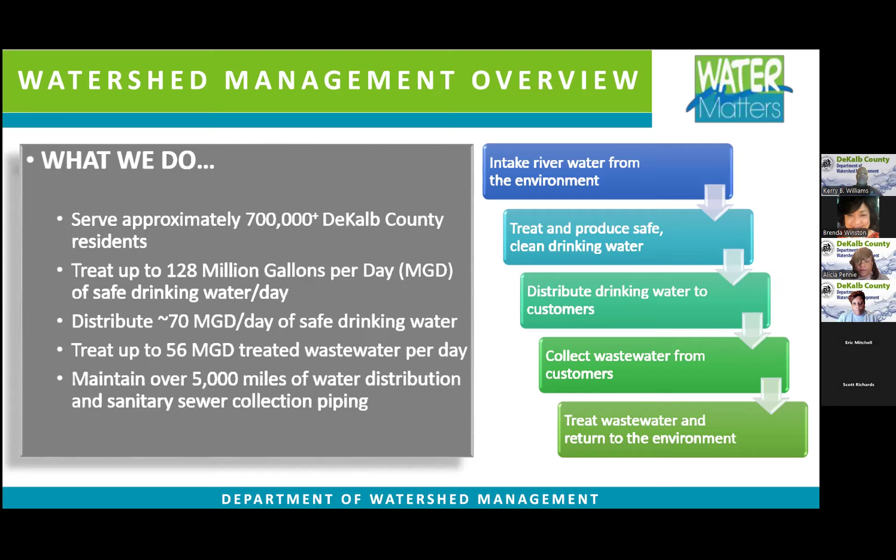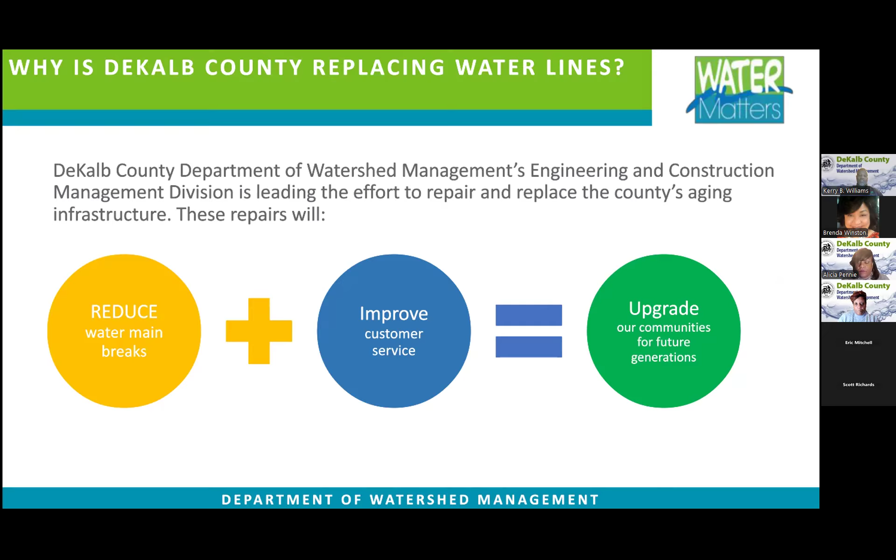So what do we do, and why are we doing this? We want to reduce the likelihood of water main breaks. We want to improve customer service, better pressure, and reduce disruptions due to breaks. So we upgrade our community again. Roads you can see get old. Pipes in the ground, you can't see them get old, but we have technology that can see that they're old. Anytime significant infrastructure upgrades take place, such as a road improvement where we have infrastructure there, we work with agencies such as GDOT to replace our infrastructure as well, so we disrupt the community only one time.

So how do we do this? We have a team, including DWM, DeKalb County Watershed, engineering consultant AECOM, contractor SAK, and GS Construction. These are the people that help us maintain our infrastructure on these type of projects.

So I'm going to step aside and let Ms. Cassandra Marshall, who's the Assistant Director of Watershed, tell you about the problem and the solution. With that, Ms. Marshall, the floor is yours.

All right, thank you, Kerry. Good evening, everybody. My name is Cassandra Marshall. My duties include overseeing Watershed's $4.27 billion capital improvement program. I also manage the construction management staff and the construction contracts.

The problem: primarily, the reason for the project is due to aged infrastructure. The pipes were put in during the 1950s, and the pipes are also undersized due to population and demand changes in the area. Typically the lifespan for these pipes is 70 plus years, so they're at the age when they need to be replaced. Also, although this area has had minimal failures, the urgency of the work has to do with the upcoming GDOT project, where they're going to do a streetscape project, paving curb to curb. So the goal is for Watershed to get our infrastructure upgraded first, prior to them doing the resurfacing project.

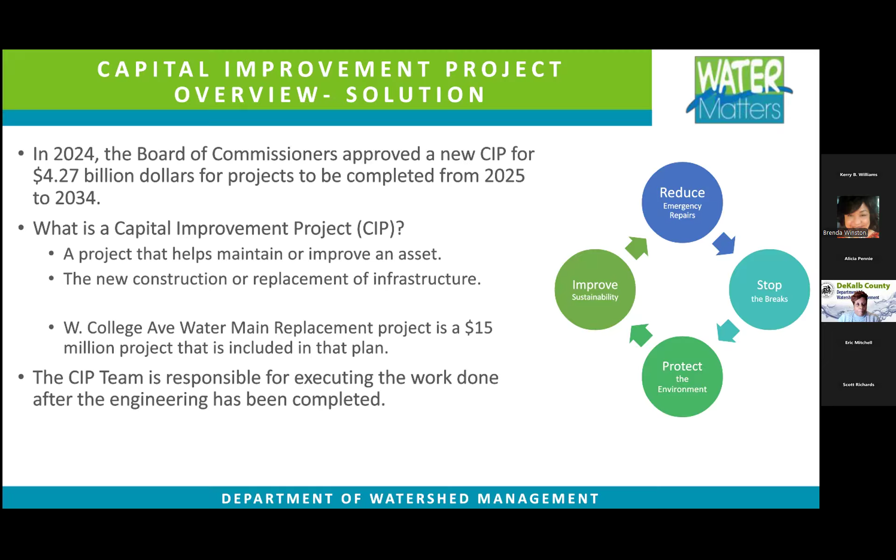Next up in the presentation, you will also hear from the DWM construction manager, Mr. Danny Mathis. Danny has over 30 years of construction experience, and he also holds multiple state licenses and certifications. You will now hear from Mr. Danny Mathis about the project scope.

Thank you, Cassandra, for the warm introduction. Again, my name is Danny Mathis, I am the construction manager. I'm responsible for the annual water sewer project, also CIP contracted projects.

West College Avenue Water Main Replacement Project Scope. Planned work includes installing nearly 420 linear feet of 6-inch DIP pipe, 550 linear feet of 8-inch DIP pipe water mains, 5,800 linear feet of 12-inch DIP pipe, and 2,250 linear feet of 16-inch DIP pipe, including service lines, hydrants, valves, pavement restoration, water meter boxes to grade.

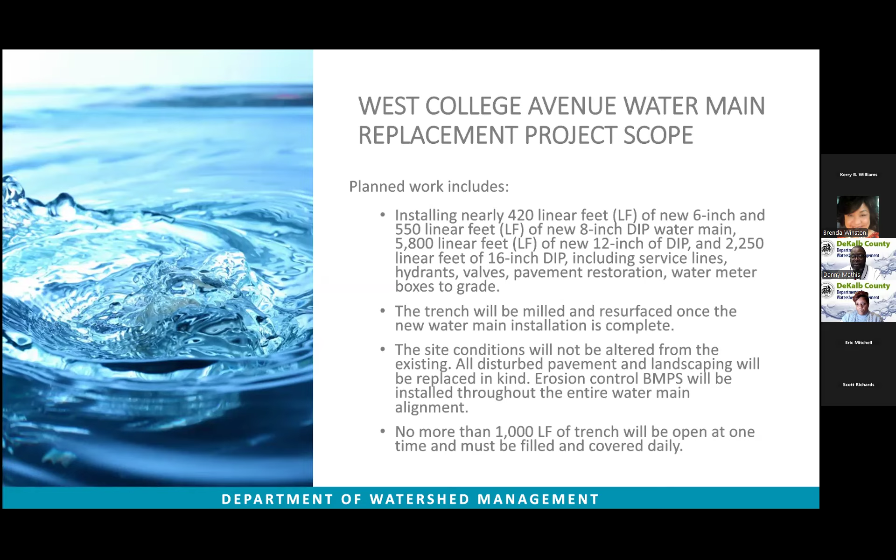The trench will be milled and resurfaced once the new main is installed. The site conditions will not be altered from the existing ones. All disturbed pavement and landscapes will be replaced in kind. Erosion control BMPs will be installed throughout the entire water main alignment. No more than 1,000 linear feet of trench will be open at one time and must be backfilled and covered daily.

What to expect? Unfortunately, what comes with construction is inconvenience, which we plan to minimize. You're going to see a lot of construction traffic, foot traffic, vehicles, large trucks, and heavy equipment. There will be construction workers, county workers, and contract workers throughout your community. Materials and equipment will be delivered by large tractor trailer trucks. Crews and flaggers will guide you through these zones.

What also comes with working in these areas is parking issues. There will be vehicles parked along the side of the street and along the work zone. Work zones will be delineated by cones and barrels. As a security measure, all county contractors and county employees will be identified with a badge and marked vehicles. There will be increased noise from equipment, backup alarms, heavy equipment, use of saws, and cutting asphalt.

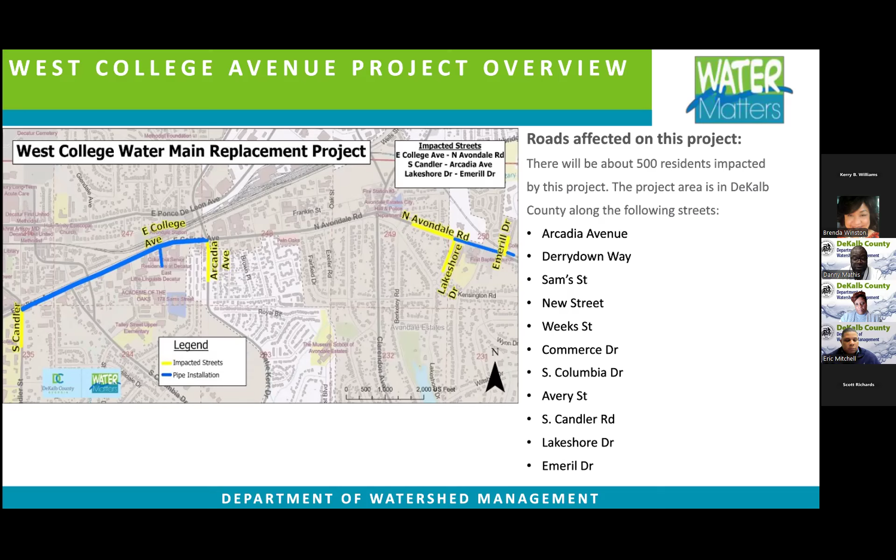The next person you will hear from would be Eric Mitchell. Eric Mitchell has about 10 years of experience in construction. Thanks for the introduction, Mr. Mathis. Next slide, please.

My team and I are the boots on the ground. We are the first point of contact for this project. From day one, we're on site monitoring all construction activities. We check that erosion and sediment controls are in place, confirm that the contractor installs the pipe exactly as designed, and ensure that safety protocols are followed at all times. At the end of each day, we make sure trenches and holes are properly backfilled and secured so the area is safe for residents and traffic.

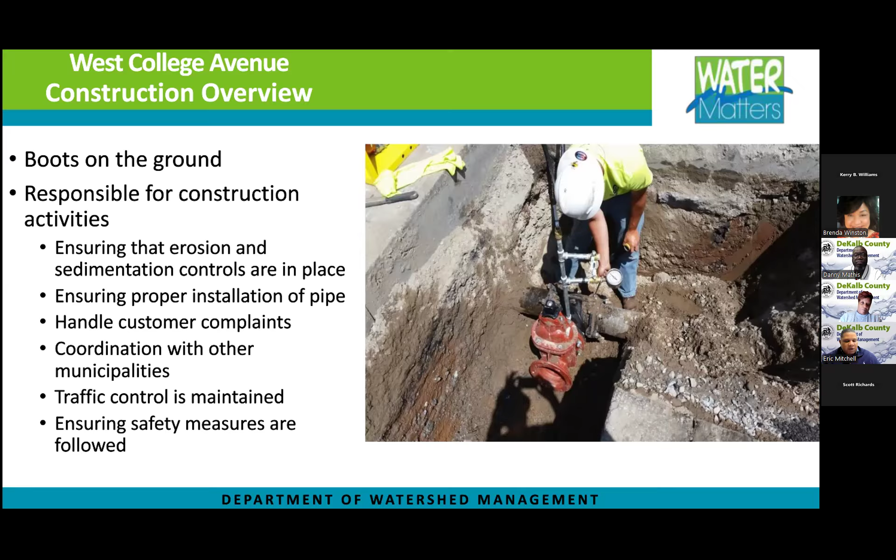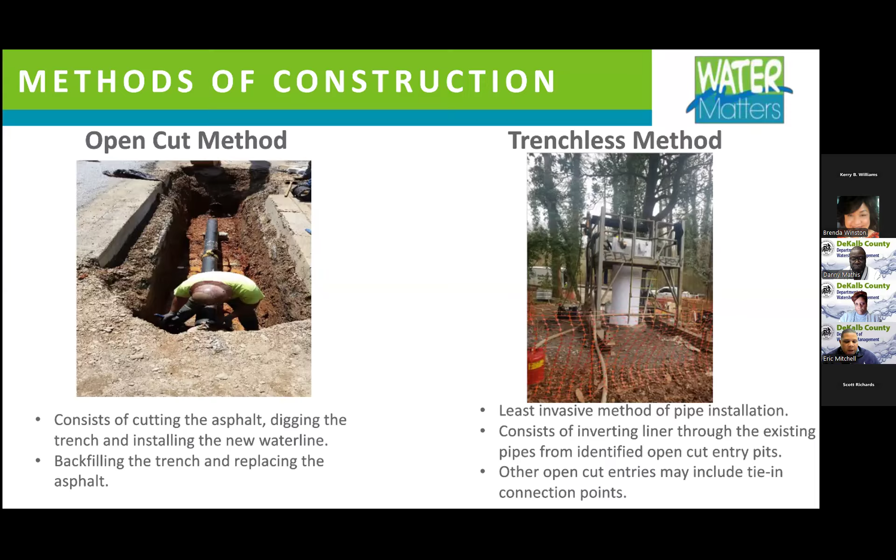Methods of construction: this project will use two methods, the open cut method and the trenchless method. Open cut consists of cutting the asphalt, digging the trench, installing the new water line, backfilling the trench, and replacing the asphalt. Our trenchless method, the least invasive method of pipe installation, consists of inverting a liner through the existing pipe from identified open cut entry pits. Other open cut entry pits may include tie-in and connection points.

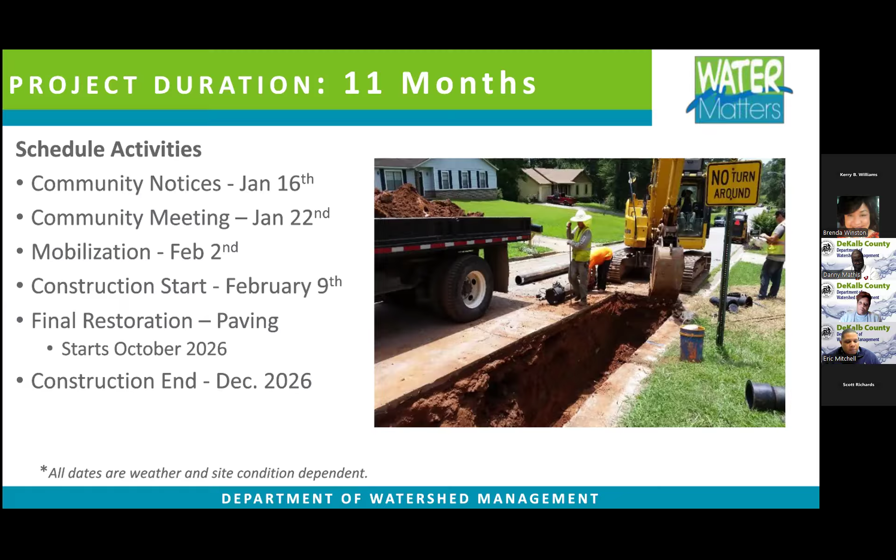Project duration is about 11 months. Scheduled activities: community notices went out on January 16th. Our community meeting is today, January 22nd. Contractor mobilization will be on February 2nd. Construction will start on February 9th. Final restoration, which includes paving, will start in October this year, and the end of construction will be December 2026.

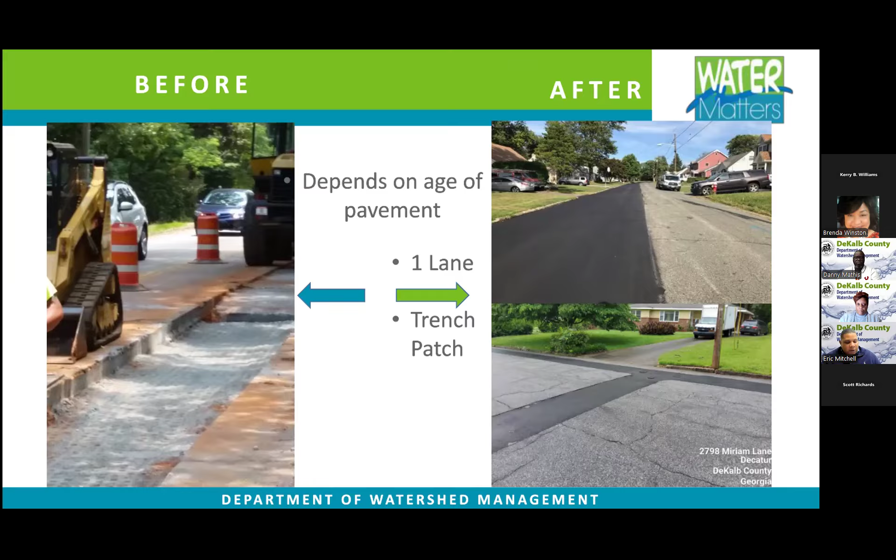I will now turn back over to Ms. Marshall, who will discuss community awareness.

Marshall, you're muted. Thank you, Danny. I was talking to myself.

Next slide, go to the community awareness slide. Danny kind of touched on this already, what to expect: increased construction traffic, foot and vehicles. However, we will have the contractors have flaggers to guide the cars and pedestrian traffic throughout the construction zone. Safety and security, we will have delineated work zones.

Any contractors, subcontractors, or employees should have a county issued badge. Typical work hours are pretty much based on the GDOT permit. Right now we're saying it's from 9 a.m. to 5 p.m., but it's really depending on whatever GDOT is saying we're allowed to work in.

Prior notifications, if needed, for water shut off. We typically give those 24 to 48 hours before any shut off and doing transfers. And environmental protection, we would have BMPs for dust control or any erosion control measures.

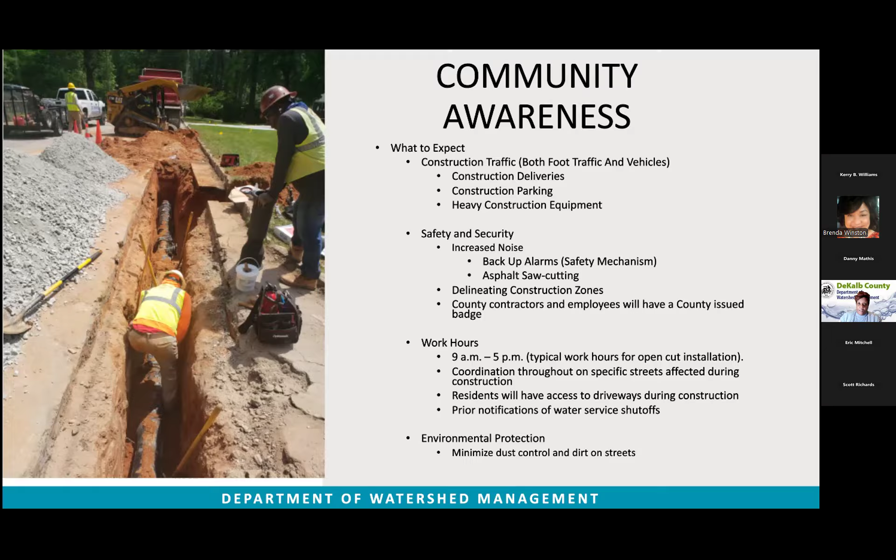Next slide. Construction yard signage or large project signs will be placed up to inform the community of the upcoming projects. In addition, we will also be putting up flashing traffic control signs. Those should be put up in the next week or so.

Also, as a security measure, we require our county contractors, employees, or subcontractors, if they're in an unmarked vehicle, to have the DeKalb County Watershed generic logo on the bottom right-hand side. Or if you're a company working with the county, it can have their company logo on the side of the vehicle. Next slide.

Again, the contractor will be responsible for providing traffic control that guides the residents and traffic through the construction zone. As far as starting the work, we will have a crew that will start at South Candler heading east. And then we will also have a second crew that will start at Arcadia heading west toward South Candler. The contractor will also have a laydown area off of East College.

That will be 601 East College Avenue. And again, for any planned outages such as service line transfer, this typically only takes maybe 30 minutes for the contractor to do. But in order to do that, we will give some type of notification in advance of any planned outages. If it is an emergency outage, which does occur when we're doing the work and hitting unknown utilities, there's pretty much no notification.

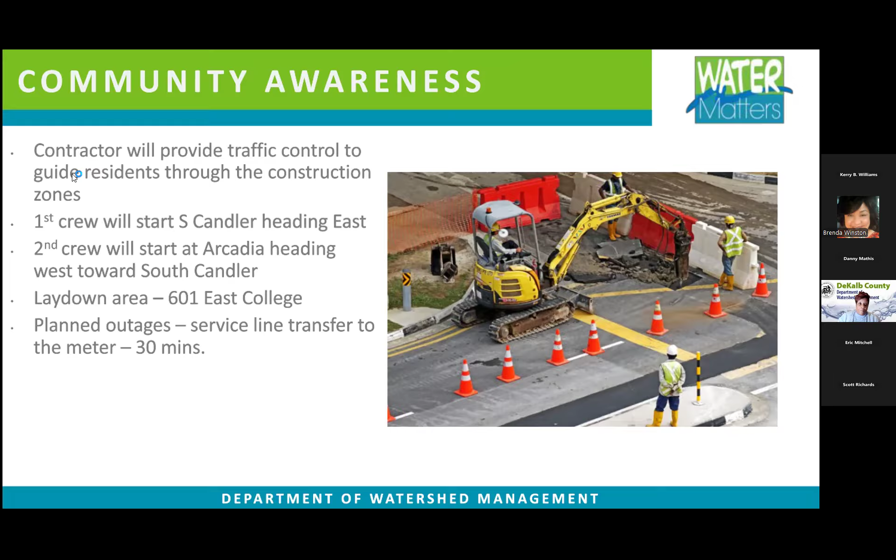So next you will hear about public communications from Miss Alicia Penny.

Thank you, Ms. Marshall. Good evening, everyone. My name is Miss Alicia Penny, and I am the Public Relations Manager for the Department of Watershed Management. I've been with the department for over 20 years, in charge of communications. Tonight I will be sharing with you the ways that we will communicate with you throughout this project to make sure that we're partnering with you and you have an awareness of everything going on with the project.